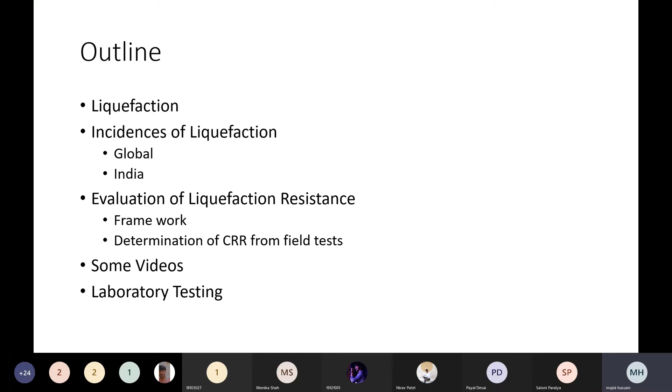So the first thing is, what is liquefaction? It is a hydraulic condition in which, in a saturated soil deposit, soil as you know is a three-phase media. It has soil particles, and in the voids there may be water or air or both. When all three are present, it is a three-phase media.

In liquefaction, we are focusing basically on saturated soils, that is soil plus water. However, recent studies have found that liquefaction can also occur in dry soils depending on the intensity of loading. If it is of impulse type, like a blast or a tunnel explosion, it can also occur there. However, we will basically focus here on saturated soils.

Now, if you look at the first diagram, this is a normal soil here. We have a saturated soil deposit consisting of granular soil, and the voids are filled with water. This bar shows the total stress acting at any depth, which depends on the total bulk unit weight of the soil multiplied by the depth.

Then there is this water pressure, that is hydrostatic, so it will also depend on the unit weight of water and depth. Under normal conditions, when there is no loading, the soil element is resting there, and you can say the total stress is the difference of these two.

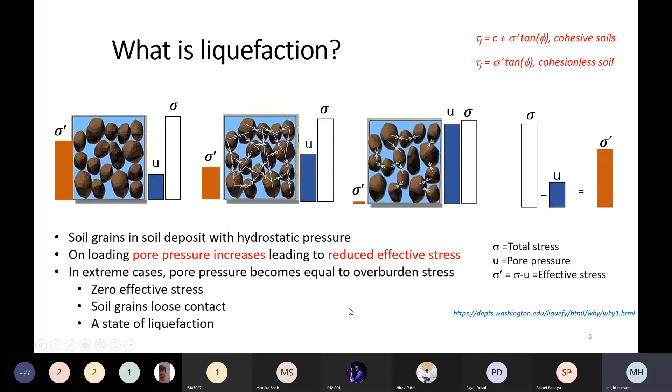So what happens is that the interlocking of the soil particles is there initially, and water pressure is present. As this water pressure develops and is not allowed to move, it separates these particles, and in between, the contact force reduces. When the contact force reduces, you can see this effective stress decreasing, and as this effective stress decreases, the shear strength of the soil decreases.

Now in the limiting case, what will happen? The loading is such that very high pore water pressures are developed, and the permeability is such that it does not allow the water to drain out. This pore water pressure almost reaches the total stress, and the difference nearly reaches zero.

This limiting condition, where the effective stress reaches zero, is what initial liquefaction actually is. So you have effective stress reaching zero, and from the shear strength property, you can see that shear strength in cohesionless soils is a function of effective stress. Now if this becomes zero, the shear strength will also become zero.

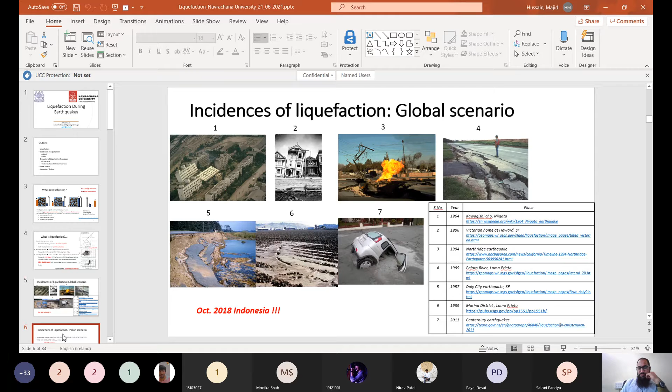Now let's look at the Indian scenario. So that was global. Now in India, these earthquakes and the liquefaction have been dated back to the 9th century, 829 to 971. So there are features that have been identified by seismologists. The Seismological Research Institute is in Gandhinagar, Ahmedabad. So they have identified these locations. And it was actually coincident that at the same place...

within 1 century, they had 3 liquefaction events. So you can say that it is actually pertinent to a specific place also, how the soil deposit is there, whether it will liquefy or not. So the same place liquefied in different earthquakes.

So you can see the history of liquefaction in India. The most documented is actually the 1897 Assam earthquake, which is famous for this - they had vertical accelerations greater than 1g. That's pretty huge, that means greater than 9.8 acceleration in the vertical direction. That means the rocks were ejected out.

If you go through a cursory Google search about the Assam earthquake, you will see that on the hilly slopes there are rock outcrops that are actually attributed to this vertical acceleration. So 9.8 in the vertical acceleration is too much, actually very huge.

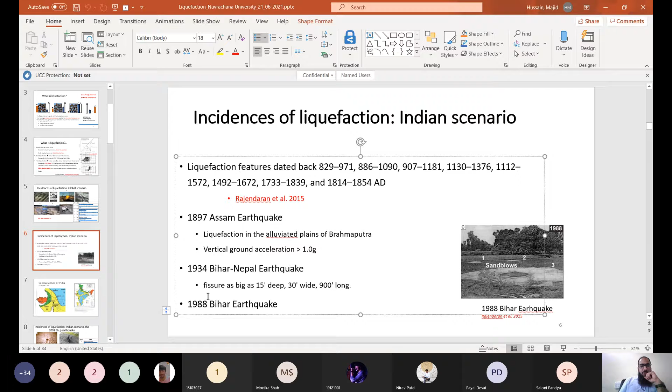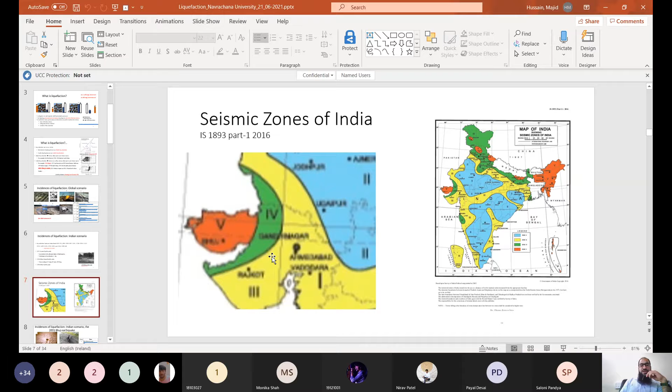Before, there were earthquakes in 1956 and I think 1819 in Bhuj. The Allah Bund fault is there, so they had similar earthquakes, but the damage was not as significant because the population was less and economic activity was less. This 2001 Bhuj event had a very high, disastrous impact on the economy and on the lives of people. Then the zones were modified, although the faults in and around Gujarat are intraplate, meaning within one plate, not plate boundaries. So within one plate they are active there, and this 2001 Bhuj earthquake forced the policymakers and engineers to actually modify these seismic zones of India.

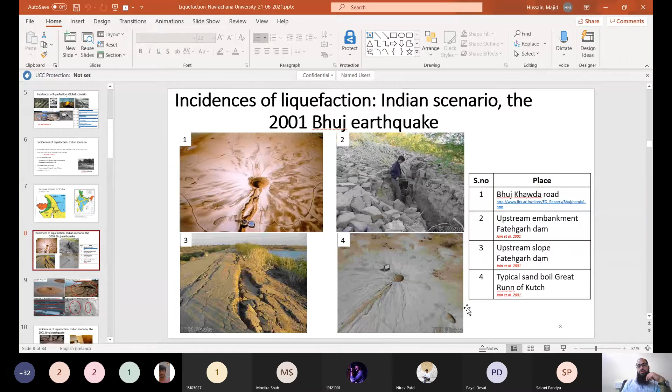While I went there, I had a visit once, and I talked to people who were actual eyewitnesses to the earthquake. According to them, downstream of this dam, they had water fissures or water jets coming up to around 12 to 15 feet high. That much pressure you can see.

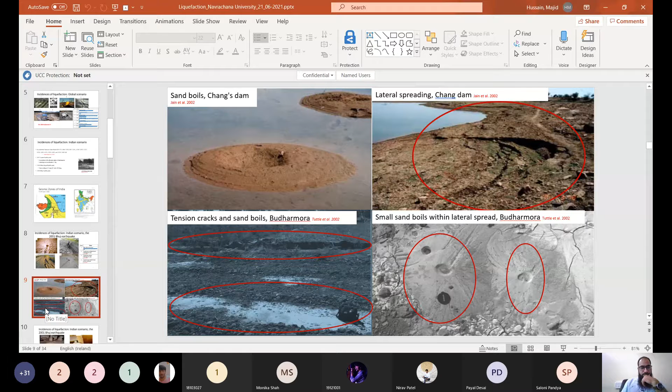Let's come to the 2001 Bhuj earthquake and how it affected the structures. It created a lot of structural damage, but here I am linking only those incidences where liquefaction actually magnified the damage. You can see this pier here, bridge side, this sand was liquefied, and this pier actually lost the firm ground because it was liquefied, the strength was reduced, and there was deviation of this deck from the pier.

Similarly here at Vondh, this pier, underneath which there was liquefaction, that actually led to the tilt of this deck. You can see this here. Now these are disasters, you cannot retrofit them because these are very heavy structures. This damage might seem like a very small crack to us, but it is a structural damage, not a functional damage that may scare you but is structurally fine. It was actually attributed to the liquefaction of the soil beneath this pier.

For further information, you can go to the NICEE website that is maintained by IIT Kanpur to get an idea.

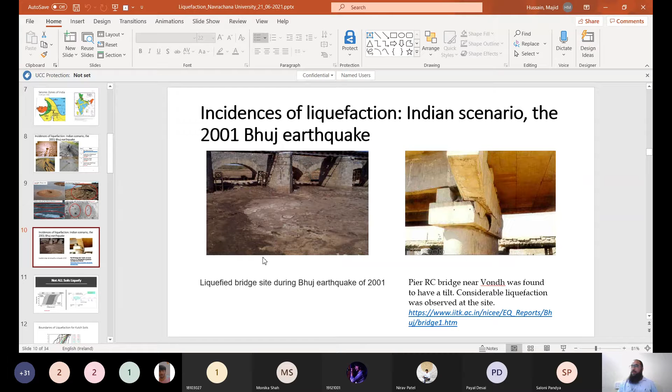Now let's come to this. If an earthquake occurs and the soil is saturated, the permeability is very low, but it has cohesion, and that cohesion prevents the effective stress from reducing to zero. So there is reduction, but it does not go to zero.

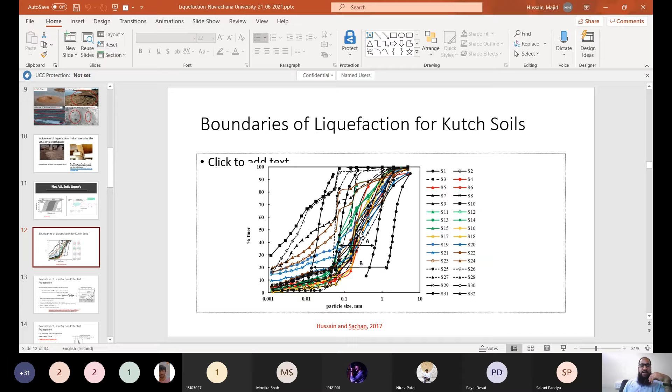Now we will discuss the framework of this liquefaction. The earthquake comes, the soil is there, it is saturated. Now what happens? First, we have to calculate or measure the intensity of the earthquake, which is measured by moment magnitude.

Now an engineer or researcher interested in liquefaction has to extract the information from the earthquake that is relevant to liquefaction, and that is termed cyclic stress ratio, CSR. CSR is the load that this earthquake puts on the soil element. It is the seismic demand, so it will depend on the site, the moment magnitude, the intensity of the earthquake, and how far the site is from the epicenter.

Now cyclic stress ratio, remember, is the load that the earthquake puts on a soil element, and cyclic resistance is the capacity. So you have two things: one is demand, another is capacity. Demand is load, capacity is strength. Capacity by demand gives our factor of safety. If your capacity is very high compared to demand, you are fine, no need to worry. However, if the ratio reaches close to 1, in the numerator we have the capacity, that is strength.

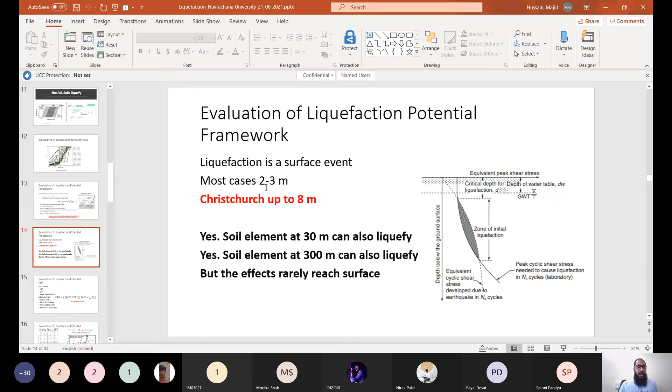But the effect does not reach the surface, and it is at the surface that you realize liquefaction has occurred, if sand boils come out. In most cases it is 2 to 3 meters, however in Christchurch it was observed up to 8 meters because of the intensity of the earthquake as well as the soil conditions.

Now CSR was done. So how do you actually evaluate this liquefaction potential? For that you need CRR, that is cyclic resistance ratio.

Generally for a good analysis, you require it to be computed from field tests, but there are also laboratory tests. Among field tests, the most common, which you might know, is SPT. This is the most widely used. Then we have CPT, cone penetration test, also known as seismic cone penetration test. Then we also have shear wave velocity.

You might appreciate here that liquefaction is a large strain phenomenon. So any test used to compute the cyclic resistance ratio, CRR, has to actually induce shear strains that are in the large strain regime.

So we will discuss that shear wave velocity does not come into that picture directly, but it is affected by the soil properties in a similar way, not proportionally, as CRR is affected. So we can relate CRR with shear wave velocity, but in most cases you will see SPT and CPT used. Now CRR is actually a function of this penetration resistance.

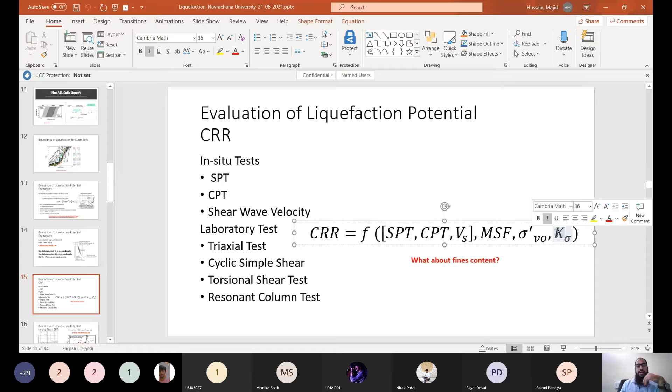Initial static shear stress means that if you have a building, or if you have a site that is loaded, that will have a different response than if you have an open ground. So that is how it comes into the picture.

Actually they are the same thing, but you define them differently. CSR is the load that the earthquake applies, and CRR is the resistance that the soil has. If I relate them, CRR is actually the load, or the CSR, that liquefies a soil in say 15 or 20 cycles. I hope you got it.

So, can anyone tell me, please, what is the difference between CSR and CRR? Nirav Patel.

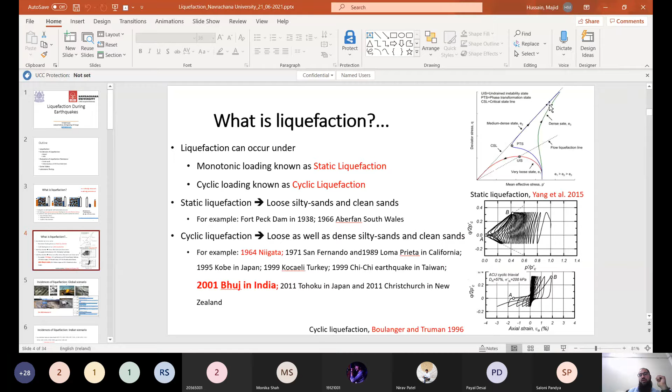Why? Because if your SPT value is less than 20, the soil is loose; above 20, it is dense. Generally it is taken as 30 - if it's 30, the soil is dense and won't liquefy. If it's below that, you have to do the analysis.

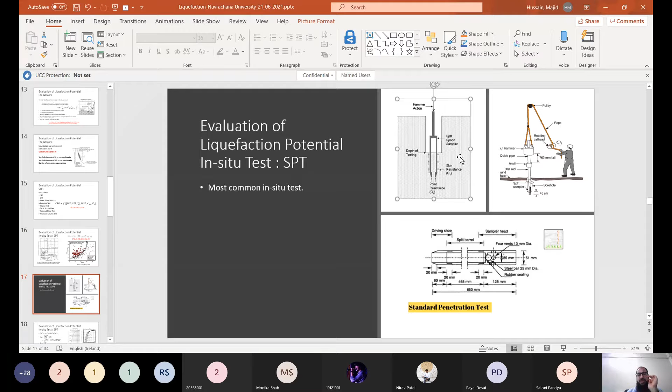Now let's discuss a few things about how this SPT test is done. You push a hammer, a split spoon sampler, and hammer it with a weight of around 63.5 kg, free falling. The fall height is 762 mm, that is 76 centimeters. That's the fall height, and this sampler is pushed in.

You can see this is hollow here. When it is pushed, it collects a disturbed sample, which you use to run analysis like grain size distribution and Atterberg limits. Now, the sampler design matters for the SPT value - you can see this diameter and that one are different. The inner part is for a lining, so sometimes you want to line it and add a liner. If it is hollow, you have to apply a correction; if it has a liner, there's a separate correction.

Now you have resistance coming from here, this point resistance. So it is a circular section actually. So you have vertical section, point resistance is coming here, skin friction is coming here, right? So you hammer it, right?

So this is the rod, you drop this weight, that is 63.5 kgs, from a height of 762 mm and count the number of blows. This sampler is actually 450 mm, that means 45 centimeters. Now when you push it, the number of blows required to push the first 15 centimeters you ignore, then the number of blows required to push the second 15, that is 15 to 30, and then 30 to 45, that you add up, that gives you the measured value in the field, the SPT value, right?

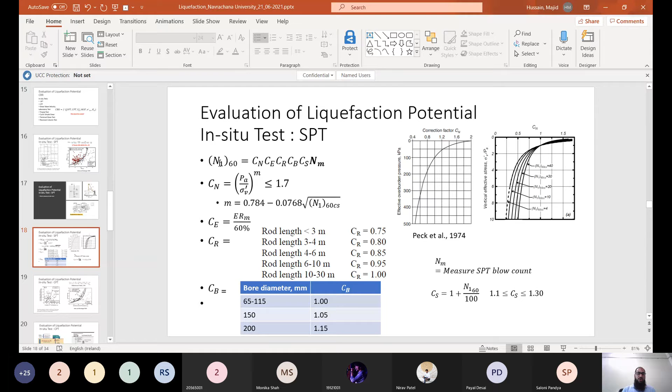So that was the SPT value. Once you have calculated this, you go back to this plot and see where your fine content is, and measure the CRR. Once you have that CRR, you go here and measure the CSR. Now you have both CRR as well as CSR.

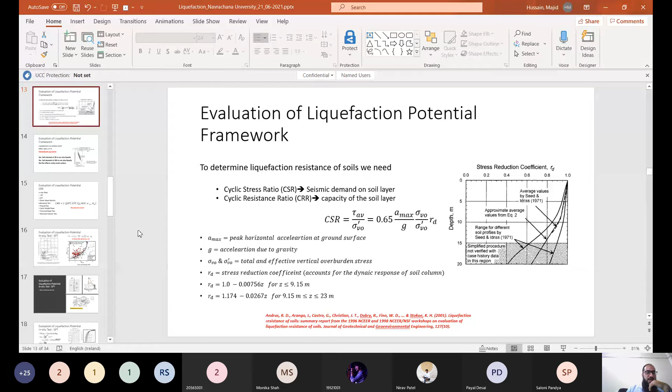You take the ratio CRR divided by CSR. If it is less than 1, it may liquefy. But if it is greater than 1.2, you are safe.

Similarly in CPT. Now in CPT, you don't require a bore, you don't require a hammer, so you actually push a cone continuously into the soil and measure the resistance that it offers. Meanwhile, while you are penetrating it, you also measure any change in pore water pressure.

Now pore water pressure is very important in dynamic analysis of soil, particularly in liquefaction analysis. If you have both pore pressure and resistance, it is icing on the cake, because you don't require a borehole here, you get continuous data, so you get more parameters here.

Now the same thing on the y-axis changes here. So you have this corrected tip resistance. You measure tip resistance, then correct it. We will discuss how, right?

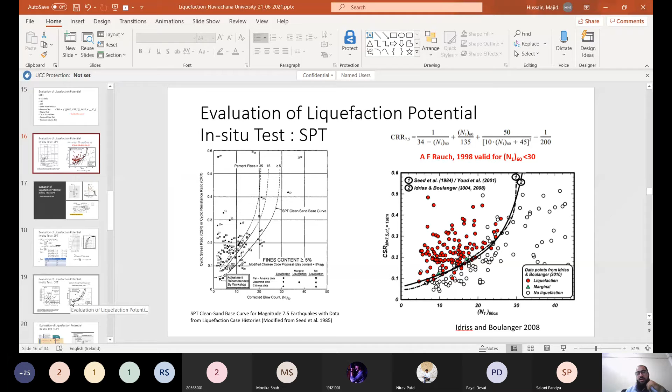And this is also from the same paper. Now you can see in 2008 it has been updated, and there are a lot of changes. This bold line and this line are from the same paper, 2004, that is 3 or 7 years from that workshop, the initial workshop. If you develop the equation of this curve, this is the equation developed by Rauch 1998. So this workshop, actually in 2001, compiled that data, all the observations, and got here.

Now you do an SPT, correct this CPT resistance, calculate it, and then let's say you see here for clean sand, if you reach here, that means any CSR above this value will liquefy the soil, and any CSR below that will not liquefy it.

So this one is the more latest one. They have released one more version of this in 2014.

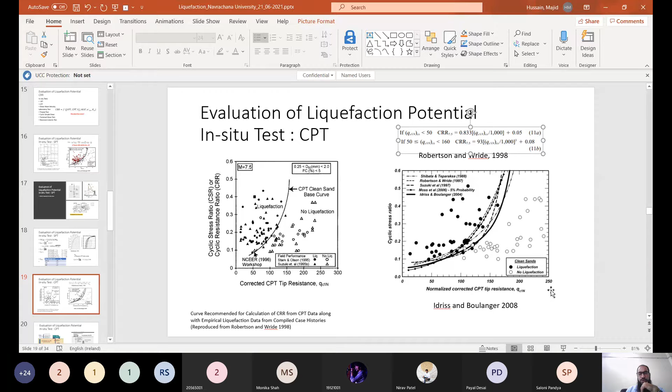In SPT, you did not have this pore water pressure measurement, but here you can see you have this pore water pressure measurement, and sleeve friction you can measure here. There it was, but you could not measure that. So here you can measure sleeve friction, you can measure this tip resistance, you can measure the pore water pressures here.

Now how you do it: you push this cone into the soil by hydraulic jacking system, or you can actually directly apply the load of this truck in increments by a reaction mechanism. This is a rig, so you apply this load, it penetrates. Now that resistance it offers to this driving cone is measured here, that is the tip resistance.

This collar has pore pressure sensors, it measures the pore pressure, and these sleeve sensors here actually measure the skin friction. So you get basically 3 parameters: sleeve friction, tip resistance, and pore pressure. This has electric cables that record this, so you don't have to do manual reading.

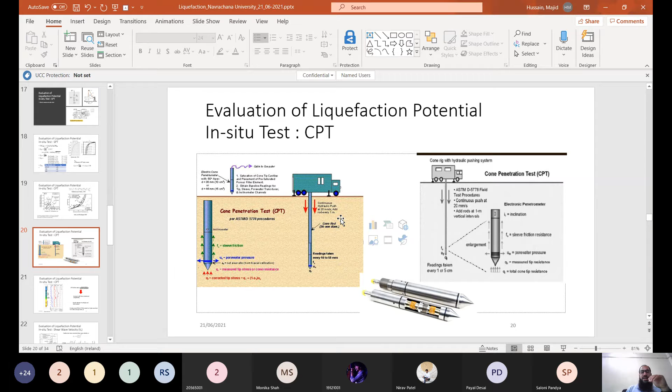This ratio is the sleeve friction ratio, that is sleeve friction divided by cone tip resistance. Now it has been observed that the sleeve friction increases with the fine content and soil plasticity, so a look at here will give you an idea about the soil type. That is why this comes.

So they have softwares right now that instantly, once you are driving the cone, give you these parameters: tip resistance, sleeve friction, pore pressure. Then you calculate this ratio, and from these values you know the type of soil. It's a rough estimate, and Robertson and Wride in the same 1998 paper developed a soil behavior chart that determines the soil behavior index, IC, which you might see in that paper also.

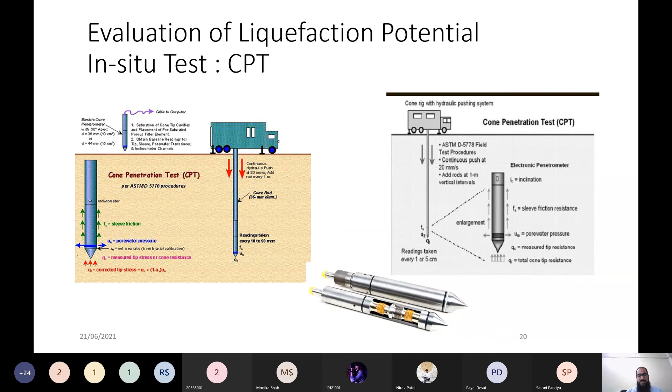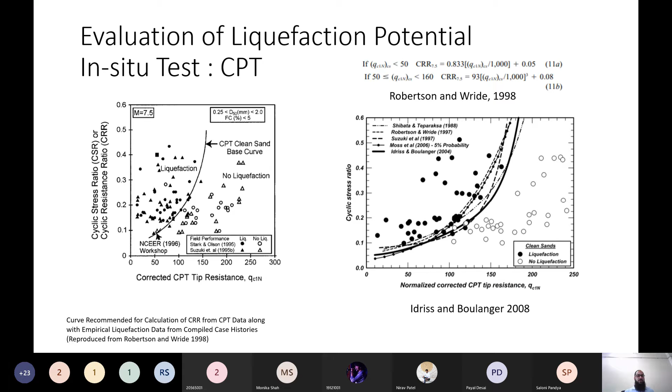Now once you have this, you correct this tip resistance by applying some factors that are given but not discussed in detail here. Then you go here, let's say 50, you have this corrected resistance 50, and you go here, you can see this resistance is less than 0.1. Now any earthquake that imparts a load greater than 0.1 will liquefy your soil. If it is less than that, it won't liquefy.

Now both of these, the SPT as well as the CPT, what they did to the soil is create large strains—the soil was being fractured. However, in shear wave velocity, you have two sensors: you create a shear wave and record at a receiver.

So you have a source, you have a receiver, you create a shear wave by hammering or by a sledgehammer, and measure the time taken by this wave to reach the receiver, and then determine this velocity. Once you have velocity, you determine from it the dynamic properties, that is the shear modulus, and this has been used to compute the CRR. Now you must remember here that Vs is a different mechanical phenomena and CRR is different.

In Vs there is no fracturing of the soil, no large strain—it is a small strain phenomena. However, CRR is based on liquefaction, and liquefaction, as you know, is a large strain phenomena because it is at large strains where pore water pressure is developed. At low strains you don't have any pore water pressure, and then you don't have any liquefaction. That means if you have a shear wave traveling, it won't actually create pore water pressures at very low strains.

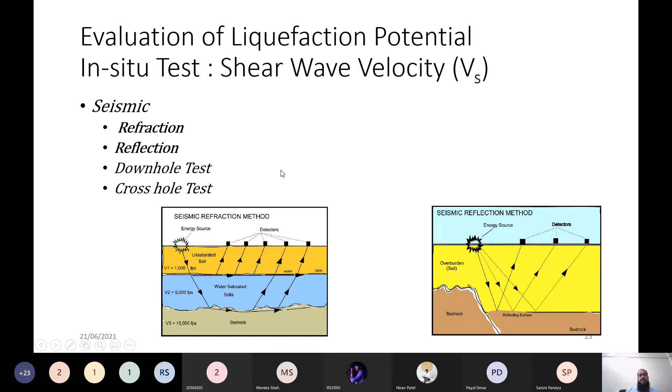So you have this source, you have these detectors that actually detect only this reflected rays of light. And here in refraction, these detectors actually detect refracted rays only. Then you calculate how much time they have taken and do the analysis and see what's the velocity and then relate it with the shear modulus.

Similarly, in cross-hole tests, you have two boreholes. Here you have an emitter or source, here you have a receiver. You know how much distance is here, and then you create a wave and see how much time it has taken. Then you get the velocity, and velocity is related to shear modulus like this, right?

Now, how do you do it? Like here, so this is the distance. You create a wave, it receives, and you determine how much time it has taken. You got this Vs value, and then you relate it with Gmax. So that is what you actually determine from shear wave velocity test. So you determine Gmax actually, which is a dynamic property at small strains.

However, liquefaction is a large strain phenomena, but from Vs, you can see Vs1 is the corrected one. So you have Vs, you got this. So this is actually related to some other properties like dynamic analysis.

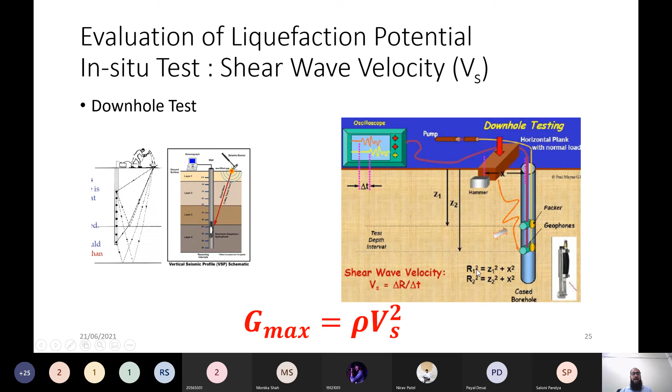Now in downhole, you have only one borehole. Once you have only one borehole, you have receivers all through the depth at different depths, and then you create a wave using a sledgehammer here. You strike it with the hammer and then see how much time these waves take to reach this. So it will be different times because lengths are different. Also, this one is intercepting different layers. So you analyze this, then see how much is this time and how much is the velocity, then calculate Vs1.

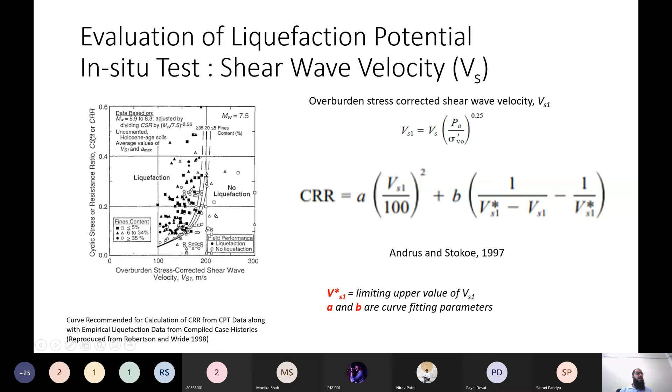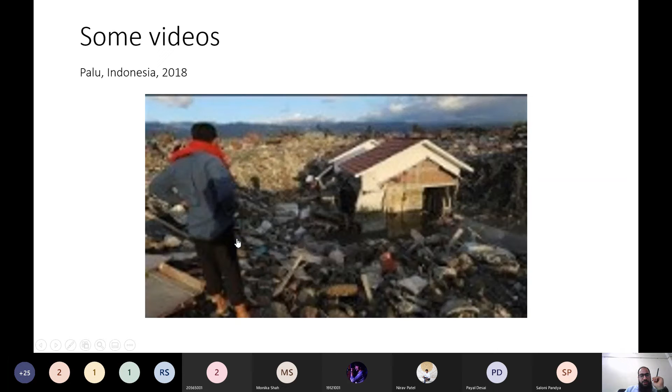Once you have this Vs1, you go here and see where your soil lies and what is your CRR, then CRR divided by CSR, then you got the factor of safety. Now some videos, I hope it will run.

So this is in Indonesia, Palu 2018. So you can see these things moving. So the underground soil has actually liquefied, right?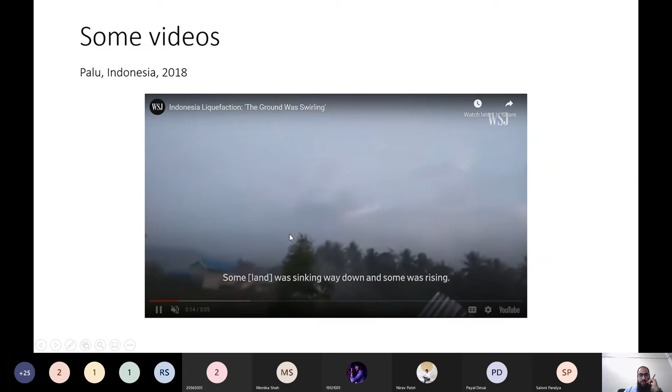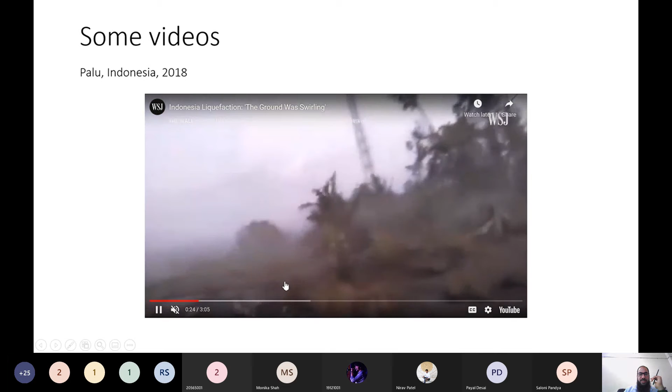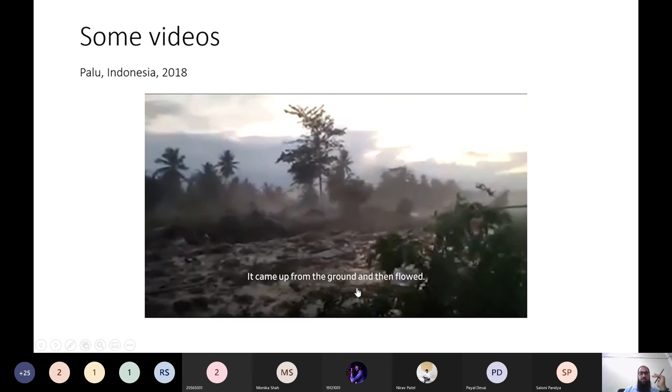You can see this house is moving, right? So it is floating on a, you can say, liquefied soil, fluidized sand plus water, it is floating, right? You can see these structures floating, right? So they were on the ground, but because of the liquefaction, the underground soil liquefied, and once it has liquefied, then it will move down the slope like water with high viscosity, nothing else, only viscosity will be there, right? So it will flow slowly with large force, right?

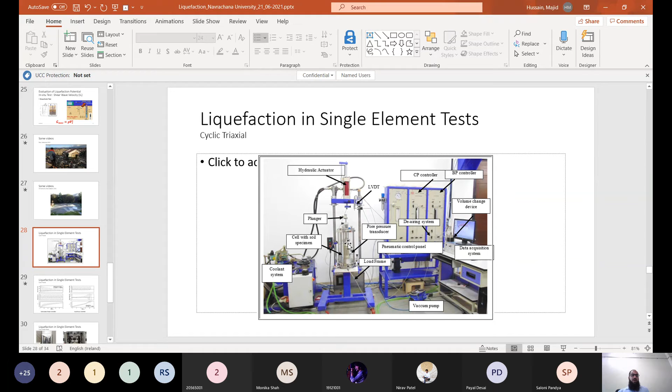This is actually the control panel here. So you apply this load to this sample. You can see, I hope it is visible here, this sample is there. You apply load in the axial direction, but in earthquakes it is actually in the horizontal direction. Now here are two things. You can apply in lab load as deformation, that is known as strain control.

In strain control, you apply load as deformations. Let's say you apply 1 mm amplitude here with a frequency of 1, meaning in 1 second it will do 1 cycle with maximum amplitude of 1 mm. So it will be 2 mm then, with 1 mm above this axis.

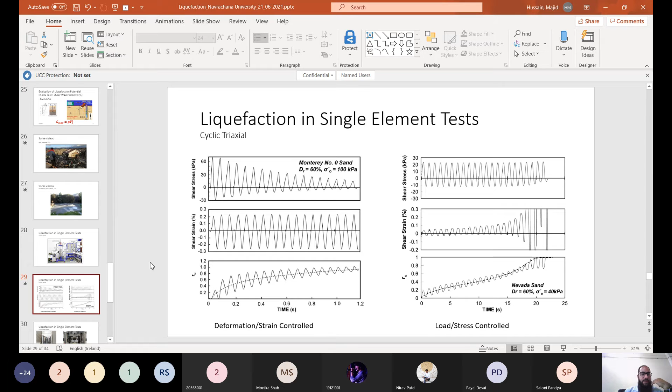In load control, you can say I apply 10 kilonewton, or 10 kg of load at frequency 1, then deformation will increase. This is the cyclic triaxial test. Another type is the cyclic simple shear test. I've included only these two tests, which deal with large deformations.

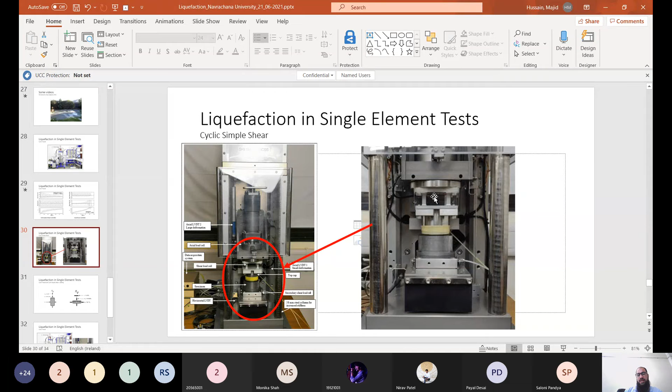These are the rings here, which make it flexible. This part moves to and fro, while this part stays at a fixed position. Thus it shears the soil.

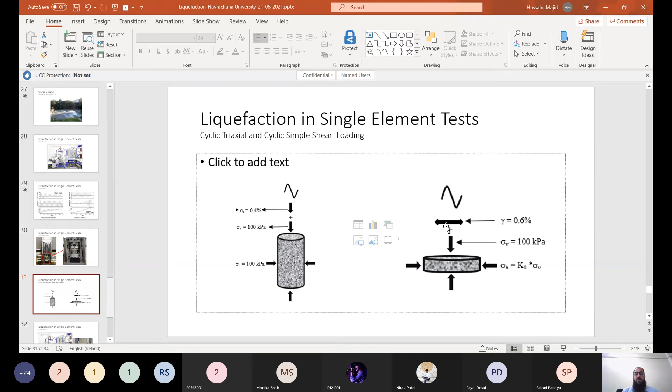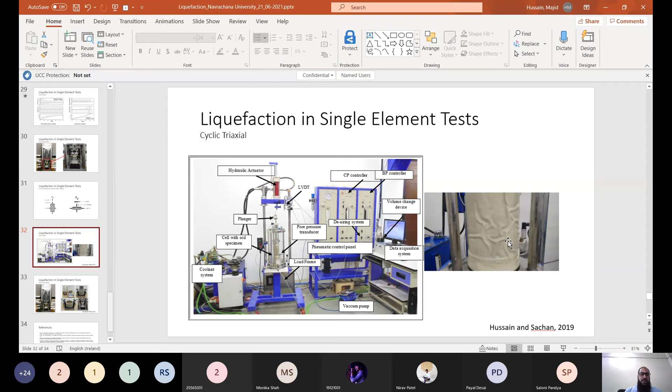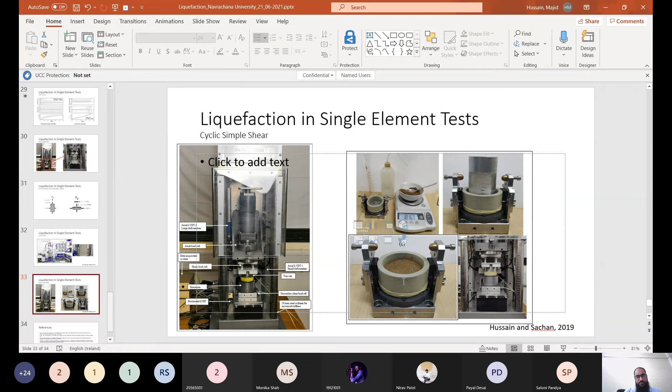What happens is that pore pressure is created. Once that pore pressure is created, these wrinkles form around the membrane, giving a visual inference of liquefaction in the sample. This is how the cyclic simple shear specimen looks, with around 20 rings that can move flexibly, sliding over one another in the horizontal direction, thus simulating earthquake conditions in a better way.

Here are some references you might find useful, particularly this one, the paper I was mentioning. It has two versions, only there's an authorship conflict, otherwise they're the same. There are also works by Idriss and Boulanger from 2008, 2010, and 2014, which give a detailed procedure for liquefaction analysis using particularly SPT and CPT.

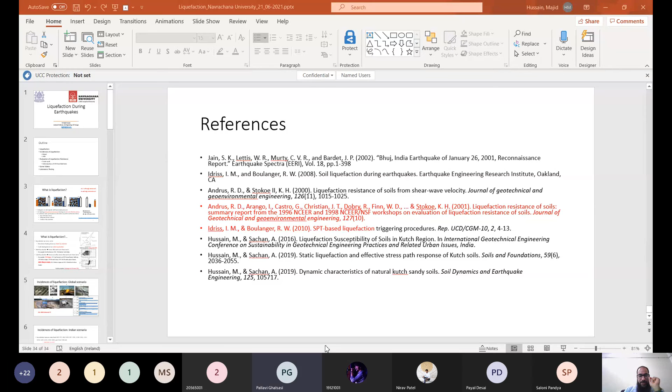Is it possible to create this kind of situation under hydrostatic pressure? Yes, that is what the initial question was. For this type of condition, liquefaction is the name given. You just need to make this zero—if I inject water even at high pressure, the particle contact will be lost. So it can be created even under static loading. I apply some load, drop some weights like you do in impact loading.

Loading is there, I drop a 10-ton load 2-3 times.

Even what I said, you have to do a ground improvement. Ground improvement uses this technique - it liquefies the soil. When it liquefies the soil, it dissipates the pore water pressure. The water that was in the voids is gone now, and these voids are filled with soil particles. That means in a given volume, we have more particles, and more particles mean more contacts, which means better effective stress.